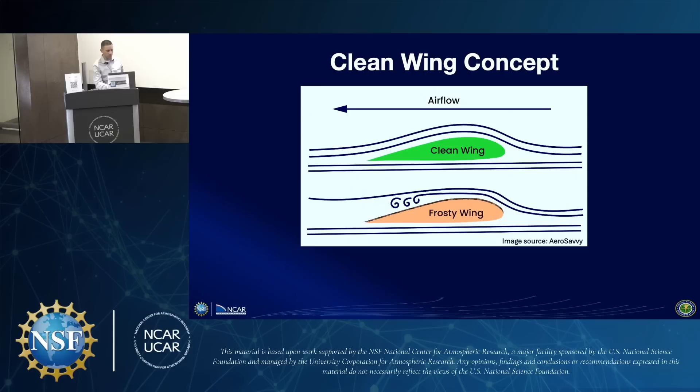So how much contamination on the wing is potentially too much that would cause a problem? Literally as little as 1/4 of an inch of buildup on the wing is enough to affect lift on your aircraft. That'll increase drag, increase weight, decrease your lift, and if you're trying to take off from the ground, it can definitely cause you problems.

So let's talk about some of the incidents that have occurred in the past that highlighted the dangers associated with snow buildup on the aircraft on the ground.

The first one I want to talk about is Air Ontario Flight 1363. This accident happened back in 1989. This was an aircraft flying from Thunder Bay to Winnipeg, and it stopped in Dryden to do a quick fuel up. The problem was when they landed, the auxiliary power unit on the aircraft stopped working.

That meant if they turned the engines off, they would not be able to get the engines restarted. That airport is also a very small airport, so they didn't have power they could hook up to the aircraft to allow it to start the engines again. So while they're stopped there, they're fueling up.

It was lightly snowing at the time. The pilot said, well, I can't turn the engines off, and regulations state that you cannot de-ice an aircraft while the engines are running. So we simply won't de-ice the aircraft.

So before takeoff, it was noted that roughly 1/4 to 1/2 an inch of snow had built up on the wing surface. And as they were getting ready to take off, they became airborne briefly, but because of that added friction on the surface of the tops of the wings, they couldn't gain altitude because they didn't have enough lift. They ended up clipping the tops of the trees at the end of the runway, and the aircraft crashed, killing 21 of the 65 people on board.

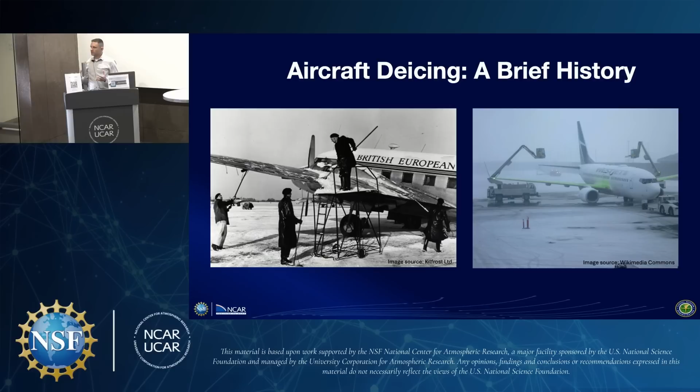So I'm going to give you a little bit more detail on the de-icing fluids themselves. So when an aircraft goes out for de-icing, the fluids that are used we refer to as type 1 fluids. These are non-thickened fluids, and that's important in what I'm going to be telling you on the next fluids that we talk about.

And these fluids are typically water and a propylene glycol mixture. For anybody who's familiar, propylene glycol is the same chemical that's used in antifreeze in your cars. So it's literally the same components that we're using to de-ice the aircraft.

The de-icing fluids are applied hot at high pressure. So the idea is not only do we want to melt any of the precipitation and contamination on the aircraft, we want to blast it off the aircraft as well. We want to make sure that there is nothing left sticking to the surface of the aircraft.

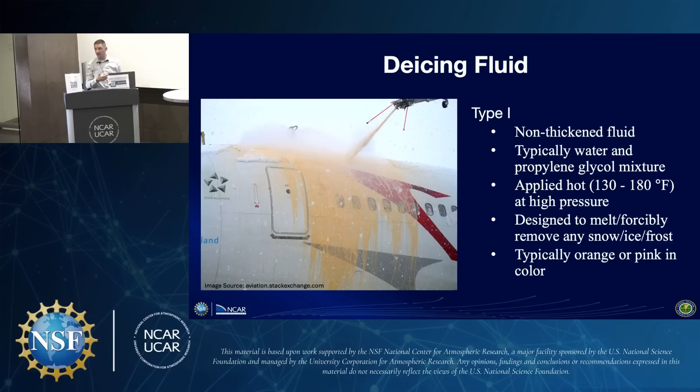These types of fluids are typically orange or pink in color when they're applied. So anybody who's been through the de-icing process, when you're sitting there, especially if you have a window seat and you look out, you'll notice the first thing is probably you're going to see this orange fluid kind of dripping down over your windows as you're going through the de-icing process.

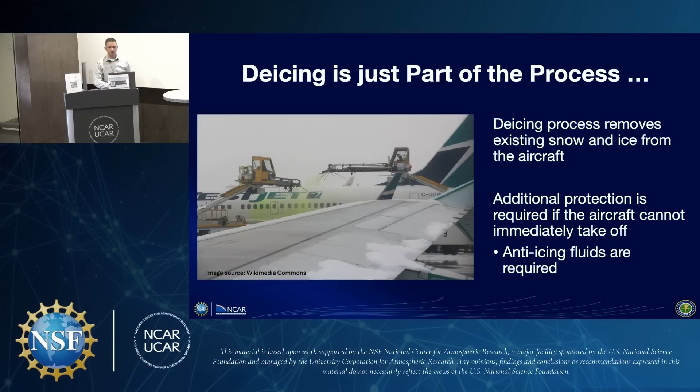However, de-icing is just one part of that process. De-icing will remove the contamination, but if you're in a situation where you still have snow and ice building up on the aircraft, and the aircraft isn't ready to take off, you need to do something to prevent snow and ice from building up. So in that case, we have anti-icing fluids that are applied to the aircraft.

Anti-icing fluids are referred to as type 2, 3, and 4 fluids. These are thickened fluids, and I'm going to talk a little bit more about that coming up. They're applied at ambient air temperature, so we do not heat these ones. We want them to reside at ambient temperature, basically so that the fluid will stick to the aircraft a little bit more.

The purpose of this is really to absorb any of the falling precipitation - rain, freezing rain, snow, freezing drizzle. Anything that's coming out of the sky is going to land in this fluid, and this fluid is going to absorb that precipitation. These fluids are typically yellow or green in color, and they're either propylene glycol or ethylene glycol-based fluids.

The type 2s were the initial anti-icing fluids that they came up with, after they realized, yeah, we can do de-icing, but if an aircraft is going to take off in these continued snowfall conditions, we need to provide protection. Type 2 was what they came out with. That color is mostly straw in color.

The type 3s are designed specifically for commuter-type aircraft. These are aircraft that are going to take off at lower speeds. And I'll talk a little bit coming up about why that's important.

The Type 4s were introduced in the early to mid 90s. They're emerald green in coloring. All of these Type 2, Type 3, and Type 4 fluids can provide protection up to 2 hours, depending on the conditions the aircraft is experiencing. The nice thing about the Type 4 fluids is if you run out of Type 1 fluid, you can simply dilute a Type 4, heat it up, and use it as a de-icing fluid also.

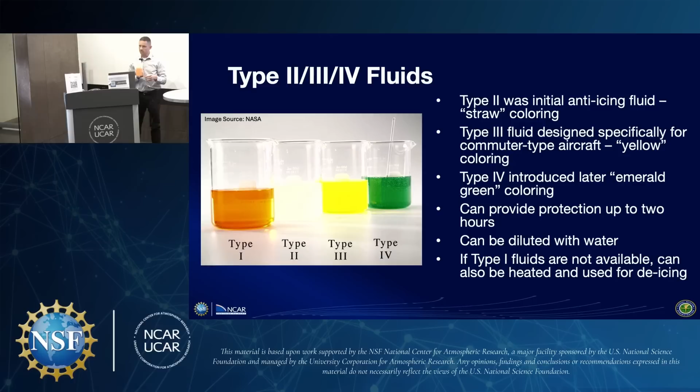Now I have some examples. Here is a Type 1 de-icing fluid. I mentioned that this is a non-thickened fluid, so you notice it's very watery in appearance. So when you apply it to the aircraft, it's heated, it's going to remove the contamination, but it's also going to run off the aircraft very quickly. So it's not going to provide you much protection.

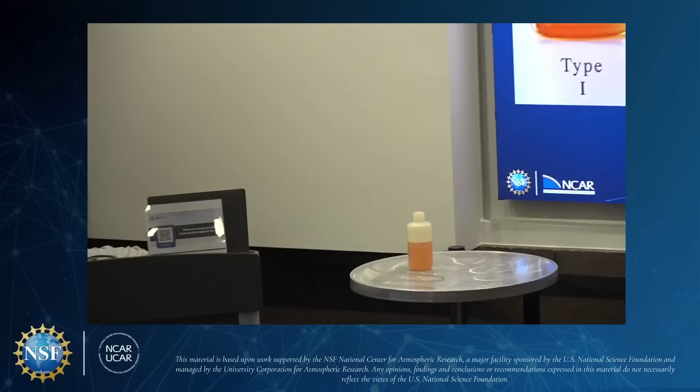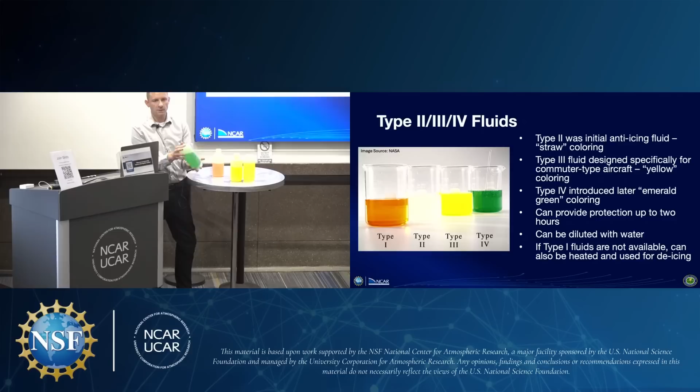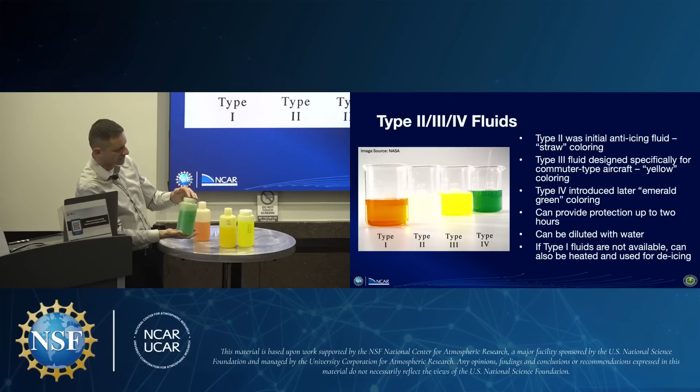Our other types of fluids - we have a Type 2 fluid, which is kind of straw-like in color, a little bit yellow. Here's our Type 3 fluid, which is more for the commuter type aircraft. And then we have our Type 4 fluid as well. Now the difference you notice with the Type 4 fluid is it's much more thick. These fluids are really designed to adhere to the aircraft surface and provide protection so that as it's precipitating, it's not running off really quickly - it's sitting there, absorbing that precipitation. Incidentally, we also call this our Slimer fluid because of the green coloring.

Why might the fluids be different colors? And again, this is for all of you in person as well as those of you online. So I will turn it over to our AV people and let them bring up the Slido questions so you can answer that.

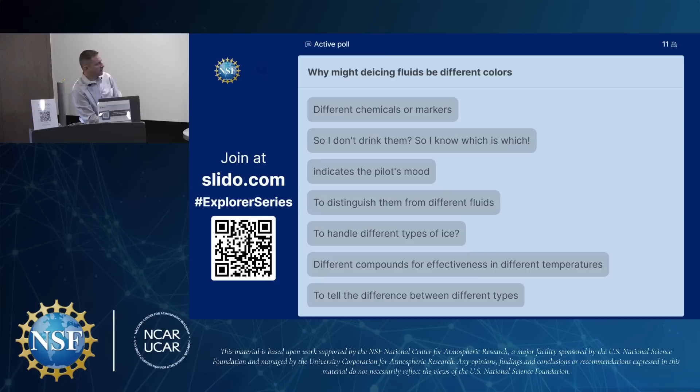Here's our answers. Different chemicals or markers. So I don't drink them, so I know which is which. Fair - I will say you do not want to drink these fluids. Indicates the pilot's mood - also fair. To distinguish them from different fluids, yes, and we're going to come back and touch on that. To handle different types of ice, also a good one. Different compounds for effectiveness in different temperatures, or to tell the difference between different types. So congratulations, you have all hit on the correct answers.

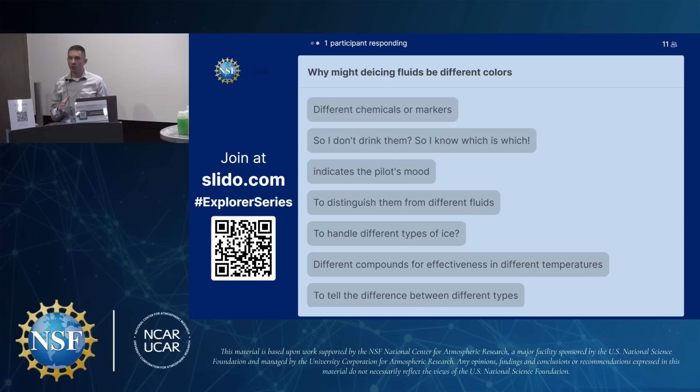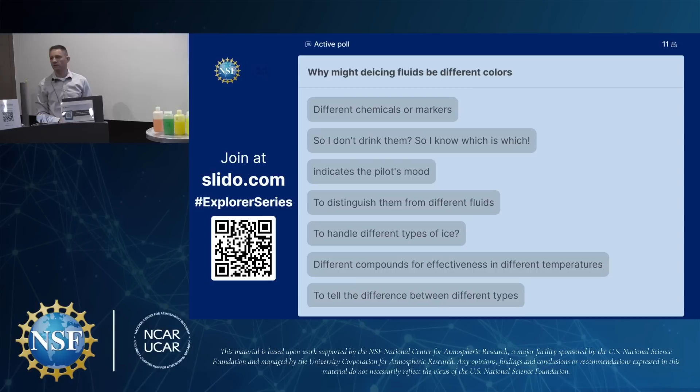The coloring is really twofold. One, it's so the de-icing people, when they're applying these fluids, can tell which sections of the aircraft they have done versus the sections they haven't. The initial fluids were not colored, so when you applied it, especially if it's precipitating, it's really hard to tell where the fluids were on the aircraft. So then we colored them different colors so you can tell Type 1, the very distinct pink-orange color, versus the Type 2, 3, or 4 fluids when applied to the aircraft. Well done - fluid visibility, perfect. All right, let's switch back over.

Now I want to talk a little bit more about these thickened fluids. I said at the beginning of the lecture that there's this clean wing concept - when you go to take off, you don't want anything on the wing. However, this Type 4 fluid, when you apply it, sticks to the wing. That's bad, right? The Type 4 fluids actually had a little bit of engineering that went into them. These fluids have a special polymer that chemists have designed that actually makes the fluid thick. So the idea is you put these polymers in the fluid, you put it on the aircraft wing, and it's thick, and it's viscous, and it's sticky.

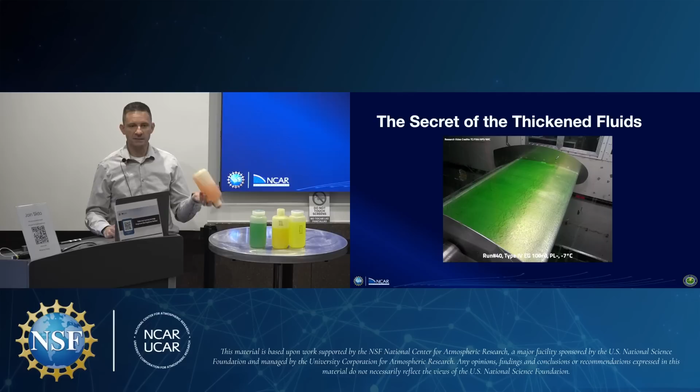But we refer to these fluids as a pseudoplastic fluid, meaning that when there is a shearing force applied, those polymers break down, and this Type 4 fluid will actually turn to the same consistency as a Type 1 fluid. I have up here a demonstration - one of the testing mechanisms we use is taking an artificial wing surface, which is what you see in the picture here, and this is actually a video. I'll start this video running in a second. This is in a wind tunnel. We have Type 4 fluid - you notice the emerald green coloring - and there has been precipitation applied to this. They've applied ice pellets in the wind tunnel to this fluid. And I'm going to start this video running here.

There we go, you notice the flashing. That's a series of cameras set up to take pictures at certain times. What's going to happen is they're going to turn the wind tunnel on, so we have a fluid that has absorbed a bunch of precipitation.

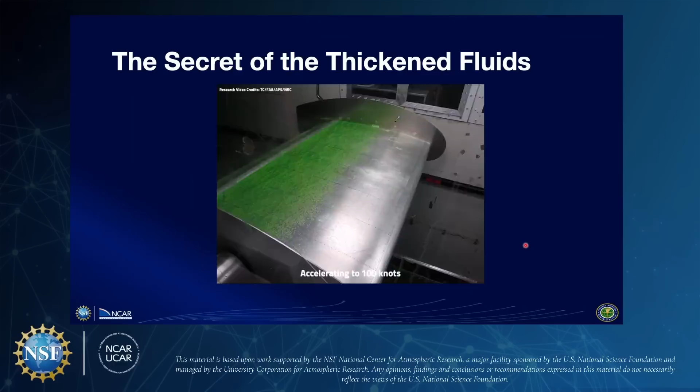It's clearly stuck to the surface, but now we're going to simulate an aircraft accelerating up to 100 knots. As the wind gets stronger and stronger, you notice the fluid becomes thinner and thinner and actually runs off of the wing. So imagine at this point the aircraft is going down the runway, reaching the speed at which it's getting ready to take off. The fluid has now completely run off of the wing along with all of the contamination, and now the wing tilts up to simulate the aircraft actually taking off from the ground.

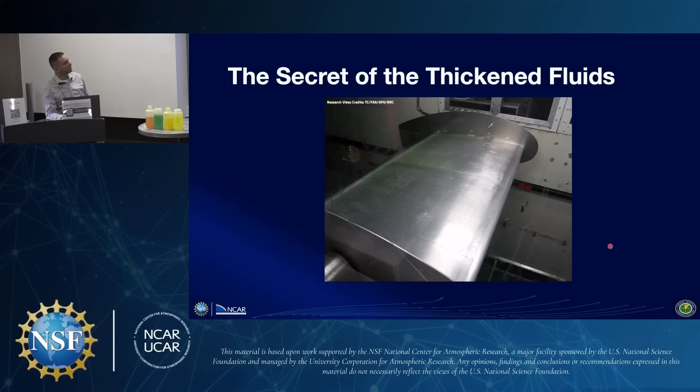So now we have a fluid that provides protection to the aircraft. It's going to stick to the aircraft when you need it to stick, and it's going to run off the aircraft when you don't want it sticking anymore. So a lot of engineering has gone into these particular fluids.

As far as the anti-icing process itself, how long those fluids are going to last is really determined by the type of precipitation that's falling. Is it snow? Is it ice pellets? Is it a combination of mixed precipitation? The rate that the precipitation is falling, and the airport layout, also has an impact on this.

So there are two different ways in which aircraft can be de-iced at an airport. There's gate de-icing. This used to occur at Chicago O'Hare all the time. The aircraft would pull up to the gate, people would get off, new people would get on, they would load all of the luggage, and then before they pushed back from the gate, the de-icing trucks would come up and de-ice the aircraft.

The problem with gate de-icing is as soon as you apply the fluids, you have a certain amount of time you have to get airborne before you have to apply those fluids again. When you do it at the gate, you've got to wait for somebody to push the aircraft back, then you've got to start taxiing, then you've got to get in line. So you're cutting into the time that these fluids are going to last.

Also, you're creating some hazardous conditions on the ground because de-icing fluid is extremely slippery. So there are a lot of slip and fall accidents that occur with the ground crews who are loading and unloading baggage on the planes as well.

The central de-icing facilities, on the other hand, are a big area at the airport, and DIA actually was one of the airports that kind of spearheaded this when they built this back in the 90s. It's a big pad that's located right next to the runway. So the idea is the aircraft will go out to this pad.

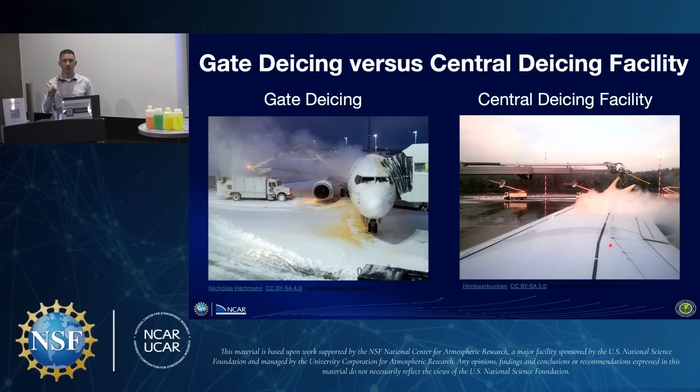All of the de-icing trucks are there. You pull up, the trucks come up, they very quickly de-ice you. If they need to, they will anti-ice you. You're given clearance at that point that you're good to go. Usually you're first or second in line, so you pretty much go, get on the runway, and take off, and you're out of there in 10 to 15 minutes after the de-icing process.

So the central de-icing facilities are really the way that airports are trying to move to cut down on a lot of the time needed for aircraft taxiing while you've got these fluids on the wings.

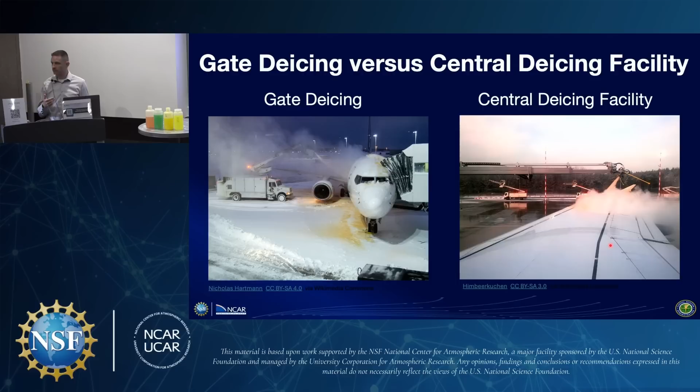So I get a lot of questions once I've talked about these different fluids. The most common one is, how long does the fluid last? Meaning, how long does it provide protection to the aircraft? There's a lot of factors that go into that.

The outdoor temperature, for example, with the type 4 fluids. So I talked about how we have these polymers in this fluid. These fluids are also known as non-Newtonian fluids because not only do they become less viscous with the shearing force, but also as the temperature gets colder, the fluid gets thinner instead of thicker. The reason is that the polymers used in here actually start shrinking down in colder temperatures, and that naturally causes a thinning of the fluid itself.

So the thinner the fluid, the more it's going to run off of the wing, the shorter the amount of time it's going to provide protection to the aircraft.

Precipitation type and precipitation rate are factors, as well as the fluid type, meaning is it type 2, type 3, or type 4, but also the manufacturer of the fluid and the dilution of that fluid. A lot of these fluids can be applied at 100% concentration, or you can apply water to them and thin them down a little bit.

That will allow you to use less fluid, especially if you're in conditions of really light precipitation and you know the aircraft is going to get off the ground relatively quickly. So it's a bit of a cost-saving measure for the airlines.

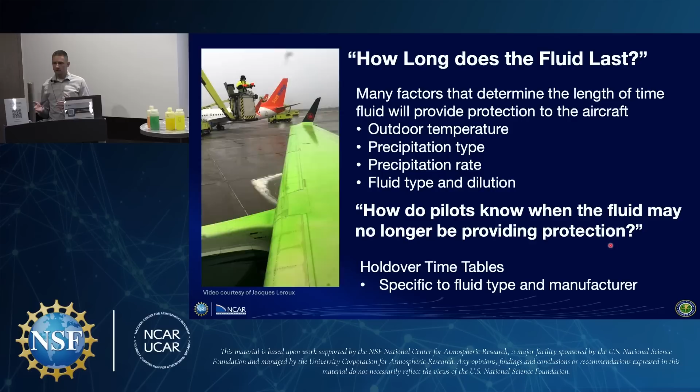These holdover times are specific to the fluid type and the manufacturer, meaning every time a manufacturer comes out with a new fluid, they have to go through an entire certification process with the FAA and Transport Canada before that fluid can be used on an aircraft. One of the things that comes out of that is these holdover tables.

Now, this is exactly one of the tables that a pilot would use. I know it's a little bit busy, but I put it up here just so you can see what a pilot has to deal with when they're going through the de-icing process and they have to figure out how long this fluid is gonna last for them. So I'm gonna walk you through how this table is used, and then I'm gonna give you an example.

So the first thing that they need to know is outside air temperature. They're given information in the cockpit as to what the current weather observations are at their airport. They'll look at this chart and say, okay, the first thing I need to know is ambient outdoor air temperature.

They need to know the fluid concentration, the fluid water by percent volume. That will be given to them by the ground crew that's telling them what type of fluid is being applied to the aircraft. And then they have to know what the precipitation type is.

So this table will give them times for freezing fog or ice crystals, snow, freezing drizzle, light freezing rain, and rain on a cold-soaked wing. Cold-soaked wing being an aircraft that has just landed. It was up flying at altitude where it's minus 60.

It comes into an airport, and maybe the airport temperature is slightly above freezing and it's raining, but your wing temperature is below freezing, which means rain hitting the wing is gonna freeze on the wing. So they have a category for that as well. Anything else listed up here, they don't have any guidance for, which falls over in the red area.

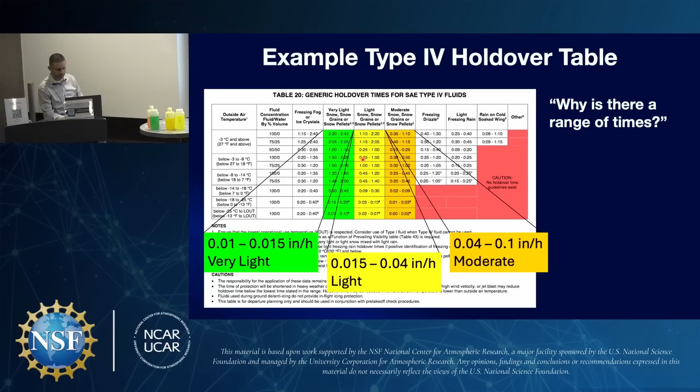It's a series of plates, and those plates are angled at 10 degrees. That 10 degree angle is done intentionally to simulate the angle of an aircraft wing, the top of the aircraft wing. So you apply the fluid to the top of the aircraft wing. We want to make sure that as the fluid is slowly moving down the wing due to gravity, we're simulating that same thing with these tests.

So we have a bunch of different plates set up, and we go out and pour the fluids on the plates. We also have what are called rate pans, not shown here, but pans similar in size to these plates that they put out there. They also coat them with fluid and leave them sit for 10 minutes. It will snow on those pans. They'll weigh them before they take them out, and then bring them inside and weigh them again. Subtract the difference, and they know how much snow, liquid equivalent, fell into that pan.

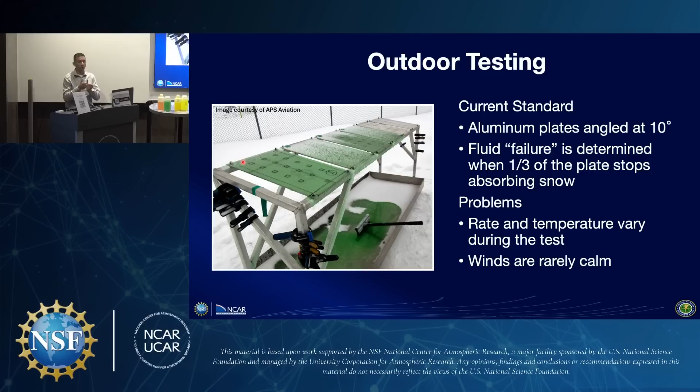Now, there are problems with doing this. Conditions outdoors are rarely ever constant. So you set these plates up, you let it precipitate, a snow band may move through. Maybe initially you've got really heavy snow, and then throughout the course of the testing it may taper off to lighter snow. Also, the temperature throughout the testing may change as well, maybe warming up, maybe cooling down. So that becomes a problem of how do you start addressing those variables when we know they impact how long these fluids are going to last.

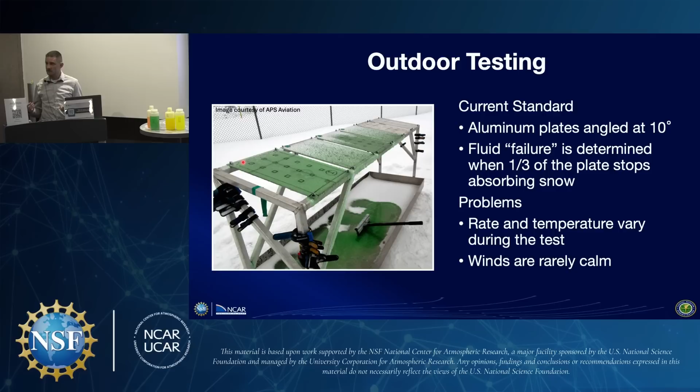There's also the problem of winds. Winds are rarely calm, and winds can further impact some of the fluids. I'm going to talk about how that is in some of the data we've analyzed on the NCAR side to show that wind actually does play, sometimes, a very significant role in how these fluids react.

So I'm going to start off with this chart. Using the assembly I just showed you outdoors, they would go out, pour these fluids on, and for a given temperature range they're aiming to have snowfall rates at all different intensities. This plot shows failure time, meaning the time the fluid actually failed, versus the liquid water equivalent snowfall rate. We can see it's not a linear relationship, it's a power relationship, but the line you see going through the points is the best fit line.

So for moderate intensity snowfall, that's the area in gray that you see here. To come up with the times in that holdover table, you would simply look at this line and say, here's the short end of the time for moderate snowfall rates, and here's the longer time. The longer time is up here, the shorter time is down here.

So going out and doing this testing and getting a bunch of these different data points and then fitting one of these lines and looking at the ranges of moderate is how we come up with those ranges of time. This chart looks good. The dots are all very close to the line, which is what you want to see.

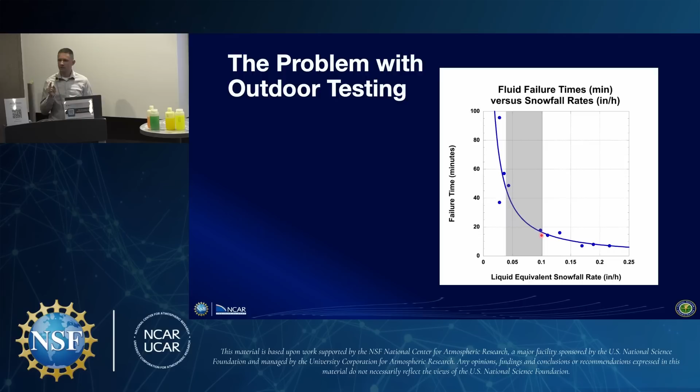Until you look really closely at this plot, notice the 2 points that I have arrows pointing to. These points have roughly the same liquid water equivalent snowfall rate, however their failure times are very different. The one on the bottom had a failure time of about 35 minutes, but the one on top had a failure time of 90 minutes. There's almost an hour difference in these 2 particular tests, and yet the average liquid water equivalent snowfall rate was the same for the 2 of them.

This is where the FAA and Transport Canada and everybody is saying, why is this? Why do we see these conditions? A lot of it goes back to outdoor testing, where you have variations in the snowfall rate throughout the test. Maybe the average rate was 0.03 inches per hour, but maybe it was really heavy at the beginning for one of the tests, and really heavy toward the end for another. Because of that, you end up with very different failure times of your fluids.

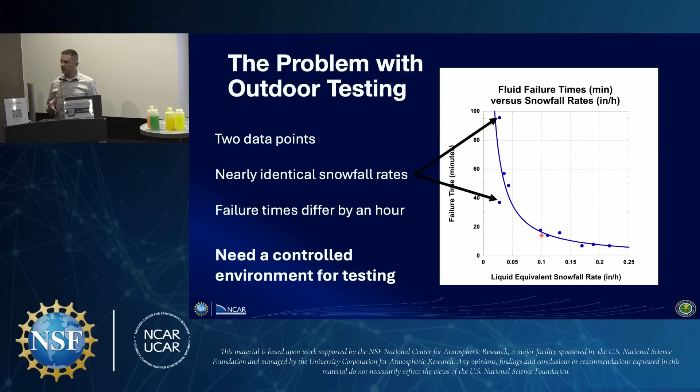So that means we need a controlled environment to do this testing in. This was recognized back in the 1990s, where the FAA, Transport Canada, and APS Aviation said outdoor testing is okay, but we really need a laboratory-controlled environment where we can do this testing. That means we need to find a way to bring the snow indoors. We have to develop a method where we can have it snow indoors and control these variables that we think are impacting fluid failure time, like temperature and snowfall rate.

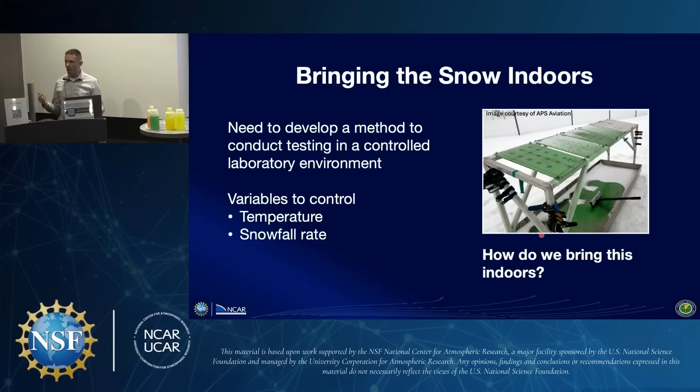So that brings the question, okay, how do we bring this indoors? Which brings me to my next Slido question for audience participation. How would you make it snow in a laboratory? I'm very impressed with all your answers so far, so let's see if you can nail this one also.

Snow machine, build a snow machine. Clearly some of my colleagues calling in online are cheating on this question. Pray and ask God to make it happen - probably not gonna work so well, but we have not tried that. Shave off pieces from a block of ice and let them fall - again, one of my cheating colleagues online. Use the same stuff as they use at the ski resorts. What a novel idea.

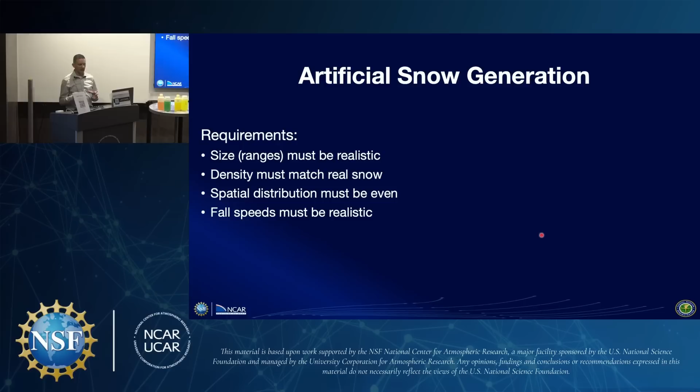If we're gonna build an artificial snow generation system, the requirements are that the size of the snowflakes must be realistic, the same size as what we see outdoors. The density must match real snowfall. The spatial distribution, meaning the pattern of snow falling over that test surface I showed you, has to be even. And the fall speeds of the particles must be realistic - you don't want snow falling at 10 meters per second and plopping into the fluid, because that's gonna cause problems.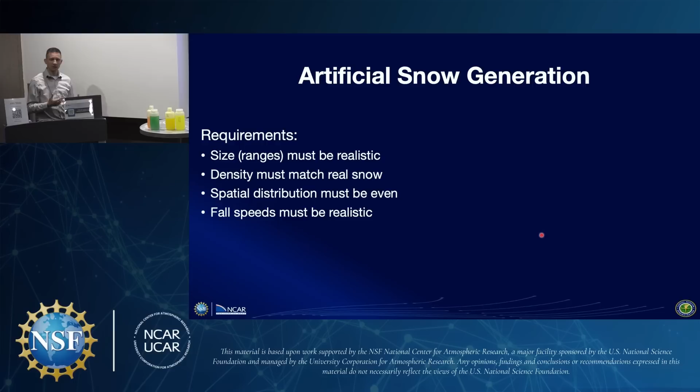So the first thought we came up with was, let's look and see what the ski resorts do. Ski resorts take water and spray it into a very cold environment to create their snow. We went out, gathered some of that snow industry snow, and looked at it under a microscope - and this is what it looks like. It does not look like snowflakes. In fact, they are very small frozen water droplets, many of which have actually frozen to each other - really more like tiny ice particles that the ski areas are generating.

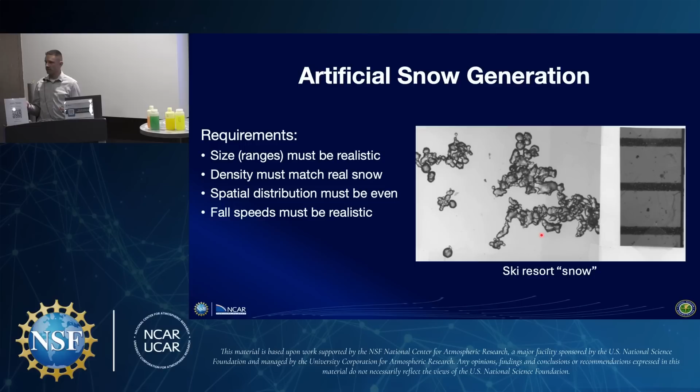That obviously means the density is not going to be right, and the snowfall rate isn't going to be right either. So this was not really a viable option for us. But we said, if we can't use ice in this manner, we could think of shaving ice, like a giant shaved ice machine. We ran with that idea and developed the NSF NCAR FAA Shaved Ice Snow Machine. The idea is that we create cylinders of ice loaded into a linear translating system that feeds them into a specially designed rotating carbide bit that shaves the ice off, creating snow-like particles.

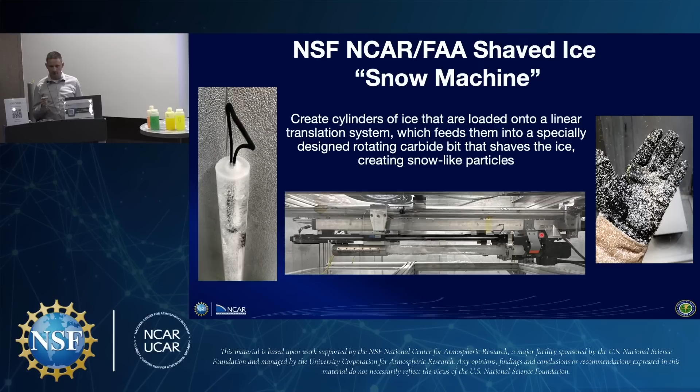Great in concept, actually works fairly well. I will say that this particular process has been something we have been working on for decades now, because while it may seem simple in concept, there are a lot of little nuances in being able to create this. And I'm going to talk about some of those.

So let's start with the ice creation process. How do we actually create the ice cylinders themselves? Initially we thought, perfect, we're going to get a metal cylinder, put some water in it, stick it in a cold room, let it freeze, and then bring it out into the open, into the warm room, and that cylinder is going to warm up, and we're going to be able to pull the ice cores out, and they're going to be perfect.

The problem was, ice likes to freeze from the top down. So when we put it in there, ice would freeze at the top, which would then increase pressure at the bottom as it was freezing down, and we would break the bottoms off of our molds. So we needed to devise a method to get it to freeze from the bottom up.

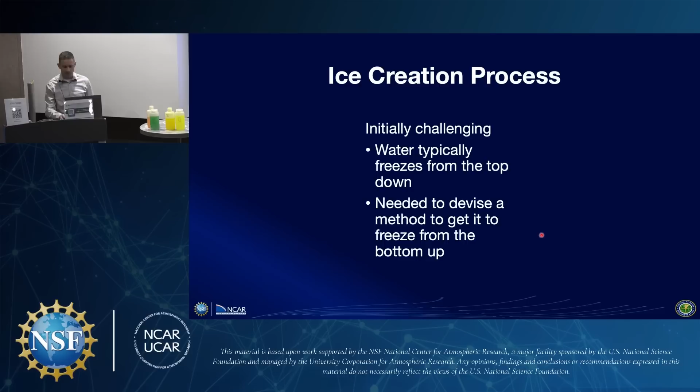So here's an example of our ice molds that we use. We take insulation, and we put really heavy insulation at the top, and then we taper it down to no insulation at the bottom. This essentially solved our problem. Now it will actually start freezing closer to the bottom first, and then that water pressure gets pushed upwards, so that now you get freezing from the bottom up.

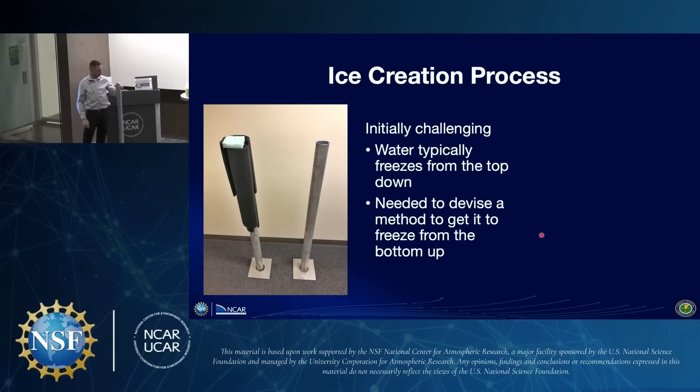To give you an idea of how big they are, this is an example of one of the ice cores that we feed into the machine itself. And this is one of our cores. So you can see nice formation of ice. Once you do that tapering, you do get lots of air and stuff that tends to get trapped in it, but for the most part, you actually have a really nice ice core that then you can take out and load into the machine itself.

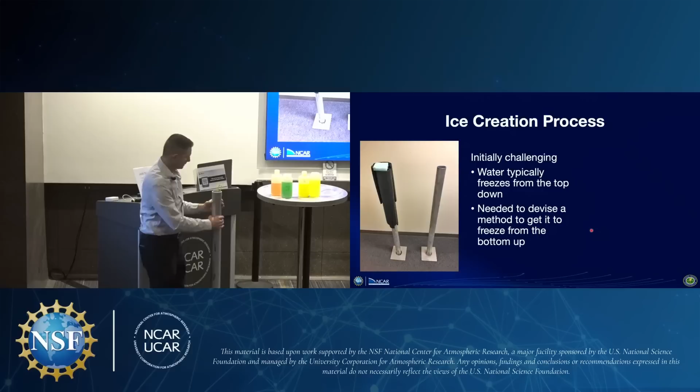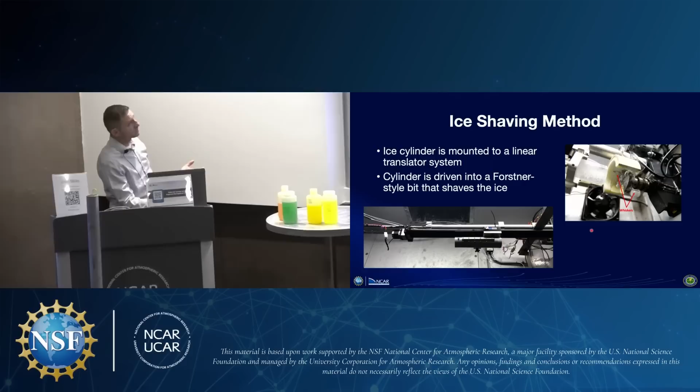Okay, so we solved the ice core problem. We were able to get these nice cylinders of ice that we could then load into the machine. So the ice cylinder is mounted to a linear translating system. Those of you familiar with a 3D printer, same type of idea.

We have this device here, which is our connector. So we load the ice into that. It's attached to a lead screw and a stepper motor back here. So the stepper motor turns, which then moves the ice along and feeds into a Forstner-style bit at the other end of the machine. This is one of our original designs that we had come up with for the machine.

At first, we simply just had the translator and the Forstner bit, and we would turn the machine on, and of course, the ice shavings would go everywhere. All over the top, all over the sides. So you can imagine when you're trying to do testing on some of these plates, when you get it down to the bottom of the machine, eventually you get big clumps that fall off the top of the machine and fall down onto the plate at the bottom. This was a problem for many, many years.

We finally came up with this idea where we have this half-moon crescent shape that is very close to the drill bit itself, and then we attach these whiskers to the drill bit. So as the drill bit is spinning, snow gets flung out and sticks to the bottom of this, but those whiskers then come around and scrape the snow off. So all of the snow now gets directed down to the bottom of the machine.

The problem with this initially was we were using foam and stuff, and if you didn't get it aligned perfectly, you would get chunks of foam that would also come flying off and land down on your test surface below. So we had to go back and do some redesigns of that.

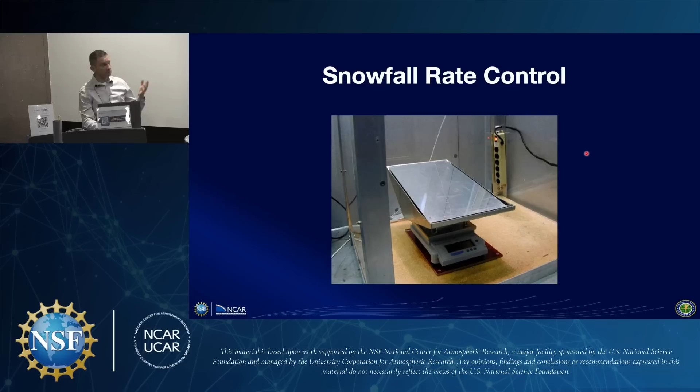Then we also had the problem of how do you control the rate of ice being fed into the drill bit to come up with a consistent rate. So we have our tray assembly at the bottom. We have our 10-degree test surface, just like you saw outdoors. We have a mass balance at the bottom of the machine that's simply weighing the weight of everything on top of it.

This is connected up to a computer. So as we run the machine, snow falls down onto the plate.

Because we have this nice fluid containment assembly, when we pour the fluid on the plate, any fluid running off the plate gets captured in that fluid assembly, but it's all confined on top of the balance. So we're not losing any weight from fluid coming off of the plate. The only thing that's being added is the snow.

So based on the amount of snow that's being added, because of the addition of the weight, we can derive what that snowfall rate is. And based on that, the computer can control how quickly it's pushing that ice core into the drill bit.

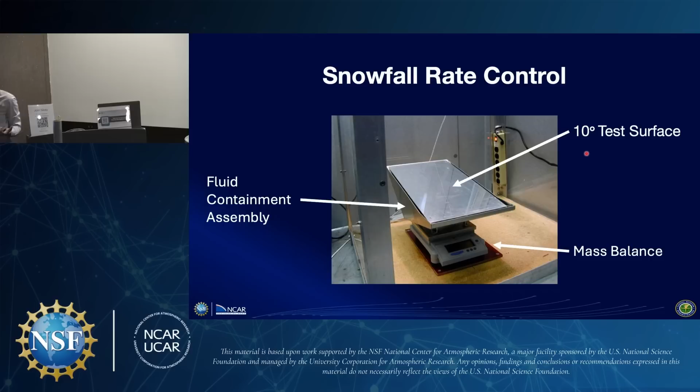Here is one of our test surfaces. This gives you an idea of the size of the test surfaces as well as the fluid containment unit.

So in any given test, we simply pour the fluid over the top of the plate. We let it run down the plate. And then this would sit on the mass balance and simply collect the snow as the snow falls down from the top of the machine.

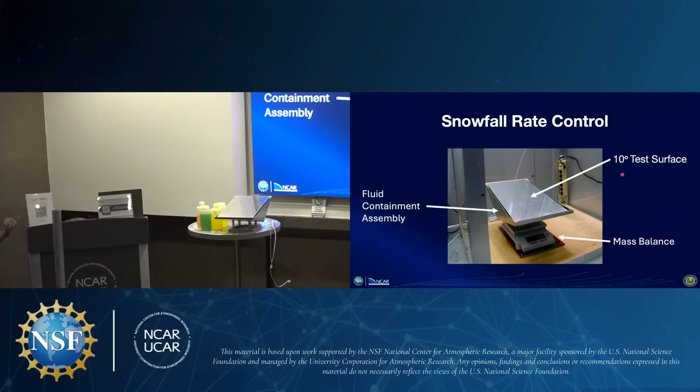So we said, okay, great, we've solved the snowfall rate problem. We know how to do that. Now we've got to design the computer interface. So this became a little bit more challenging. We were able to do it.

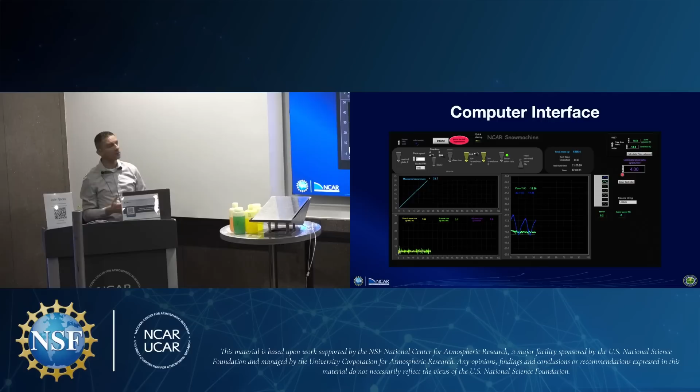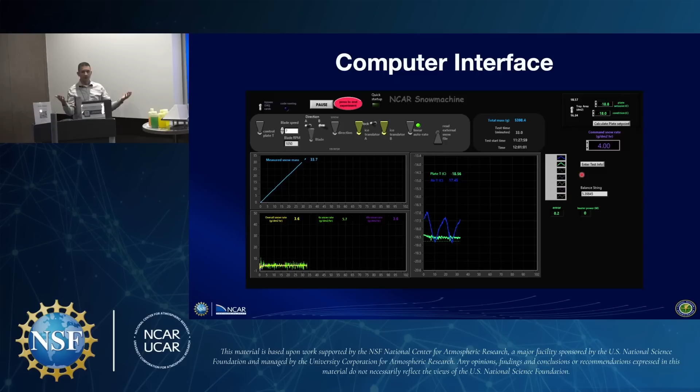So we have full control of everything that happens in the machine. We can turn the blades on. We can simply put in the rate that we want the snow. The computer will control that rate. And then we can record all of the information coming out of the machine.

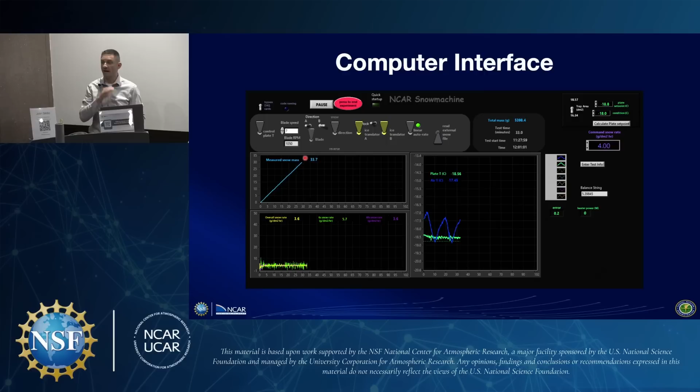So we can monitor the air temperature. We can see the snow mass. This nice straight line shows that we have a constant amount of snow mass being applied to the plate. So we've been able to successfully achieve a constant snowfall rate.

So that's the mass, and then we can actually monitor the rates in real time at the bottom of the machine.

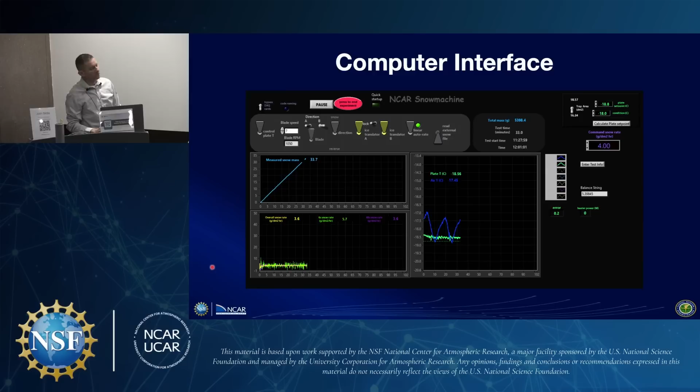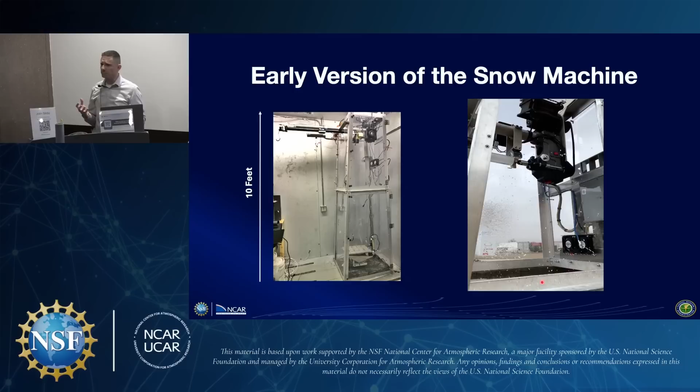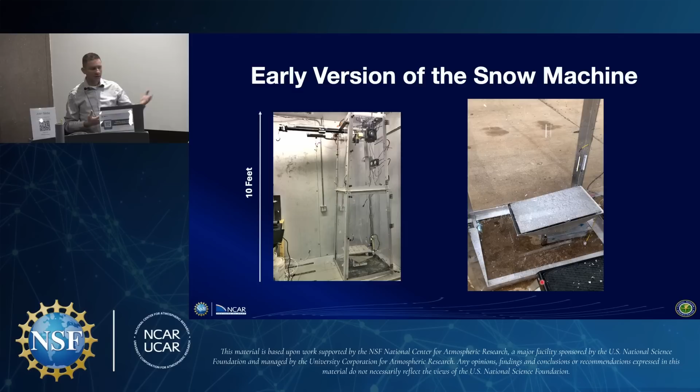Great, so put it all together, and here is what the early version of the snow machine looked like. I'm gonna play a little video for you. Initially, we were using a drill press mounted on its side with a bit attached to it to do the actual ice shaving. You can see from this video that you are getting what looks like snow-like particles that are being shaved off of these ice cores and falling down onto our test surface at the bottom.

The problem that we were having was that spatial distribution problem. Because we had one point that we were generating snow, we'd get a lot of snow right over the middle of the plate, and then it would kind of taper off as you got out toward the edges of the plate. So we would see this streak of snow that would fall down the middle of the plate, and you would get less out here, which is not realistic for the outdoor conditions.

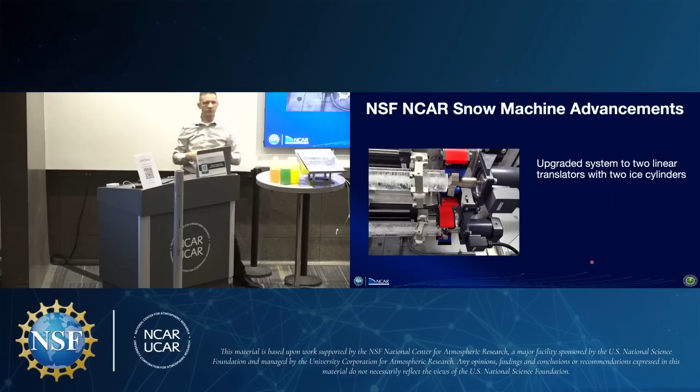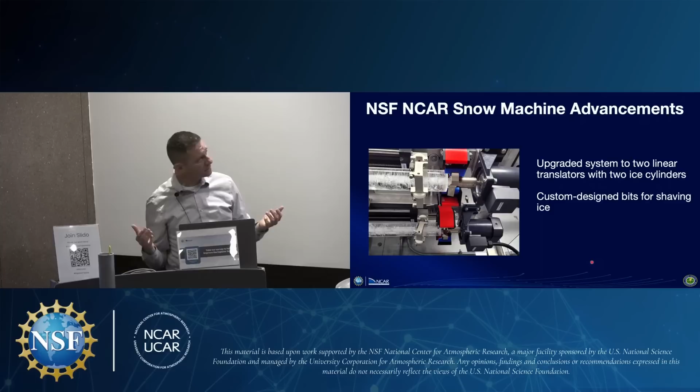So we said, let's do an upgrade. Let's put 2 ice cores in. And instead of using a drill press, let's swap those out with variable speed motors. We did this, and had some custom design bits for shaving the ice that were designed as well.

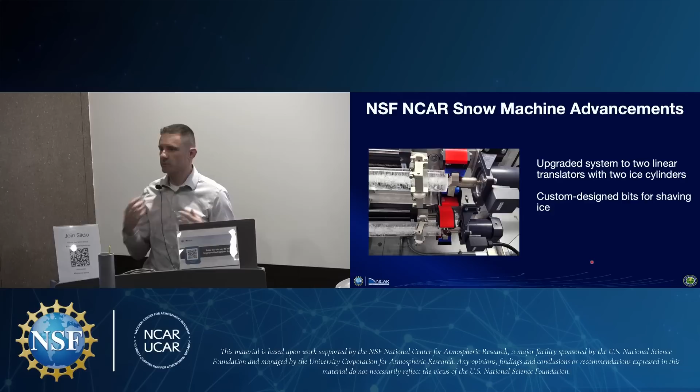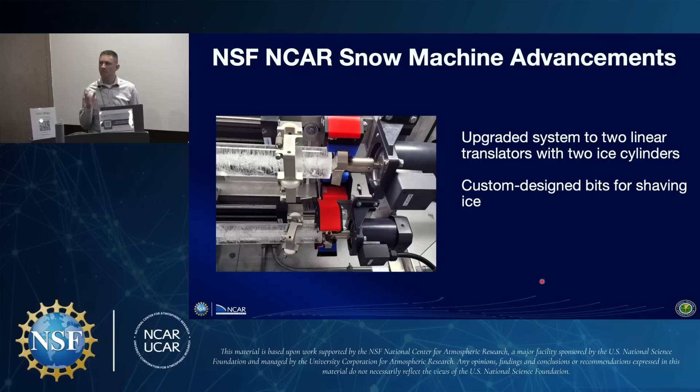We were having a lot of problems with the bits getting dull very quickly, also chipping away at the ice, which wasn't giving us consistent shavings that mimic snow. So we had to custom design our drill bits. We found that the angle of the bit, even by 1/10 of a degree, made a huge difference in the type of snow that you would get out of these ice cores.

We replaced the drill press with the variable speed motors. The advantage to doing that was by controlling the spin rate of the bit, we could actually control the size of the snow particles that we were generating. Slower spin rates means the ice core isn't being shaved as quickly, you get bigger flakes. Spin it faster, and you're gonna get smaller snowflakes. So now we can actually control the size of the snowflakes and test these fluids based on particle sizes.

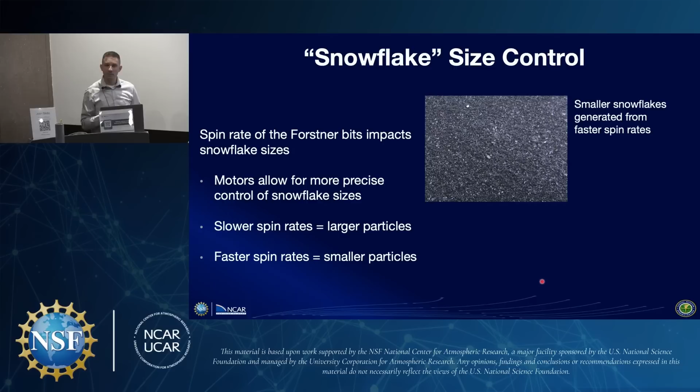So what does that look like? Here's an example where we had the spin rate of the bit really fast, so we were getting these really small particles, these really small shavings of snow. Then when we slowed it down for the same conditions, same rate, same temperature, now we could see that we were getting bigger snowflakes.

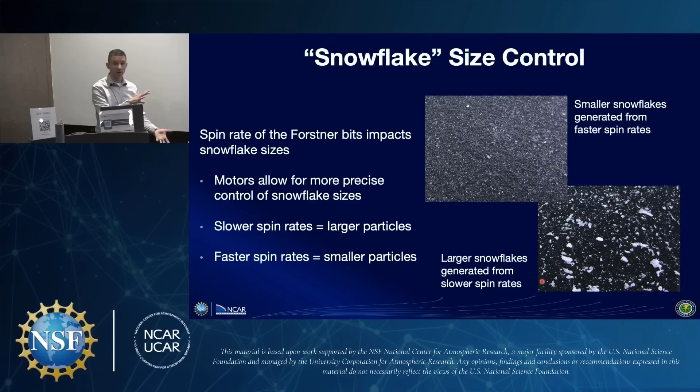So this has given us an advantage that we can really look into some of our outdoor environments at warmer temperatures where you may see these big aggregate snowflakes that are falling sometimes, or smaller snowflakes. We can go in and simulate both conditions. We could not do that very easily before.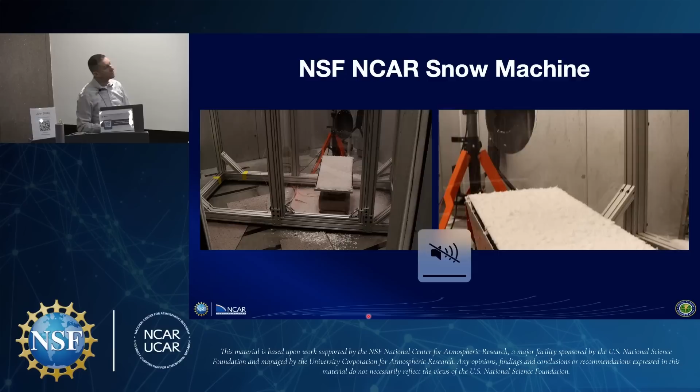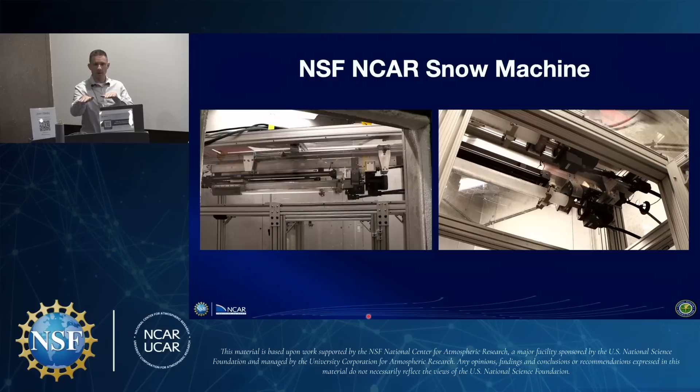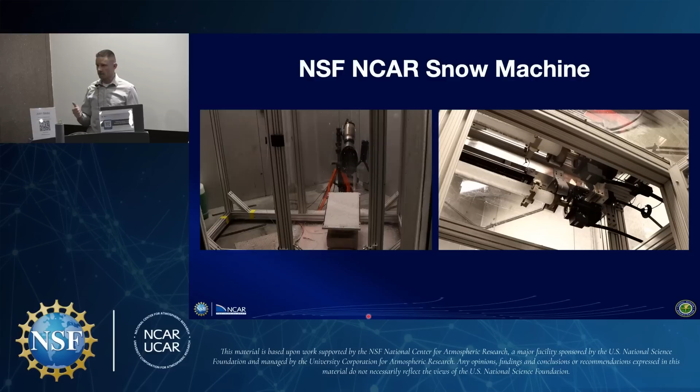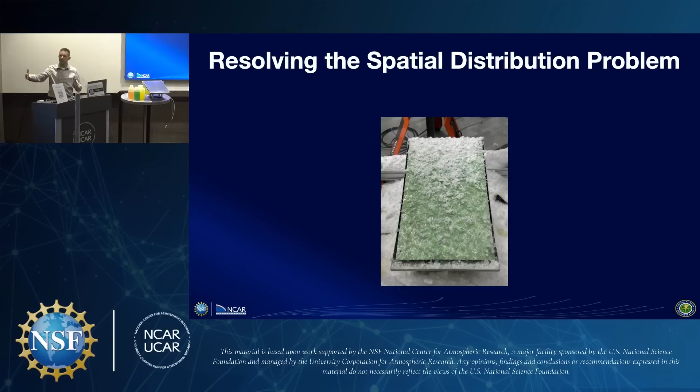So now when we do our testing, instead of getting that line of snow down the middle, we get this nice failure that goes from the top of the plate down toward the bottom of the plate, just like we see in natural outdoor conditions. So we finally checked that last box.

And this latest version of the machine actually just came into being last year. So we're literally on the forefront of finally solving this longstanding problem. I'm gonna talk a little bit about what that means for where we move in the future.

Now, I also wanna show you, because I've talked a lot about the fluids, when we apply fluid to the plate, what does it look like in terms of the fluid being absorbed in, or the snow being absorbed into the fluid? Here's an example from the machine itself, where you can see snowflakes coming off, falling into the fluid, and you can see them dissolving into the fluid itself, and the fluid absorbing them and holding on to them, so it isn't adhering to the surface of the test plate itself, and that's what we want to see.

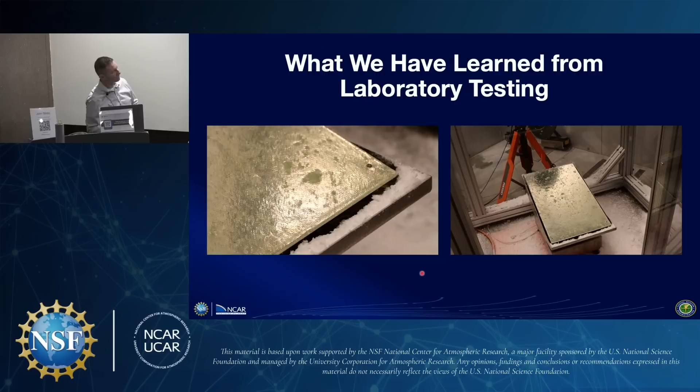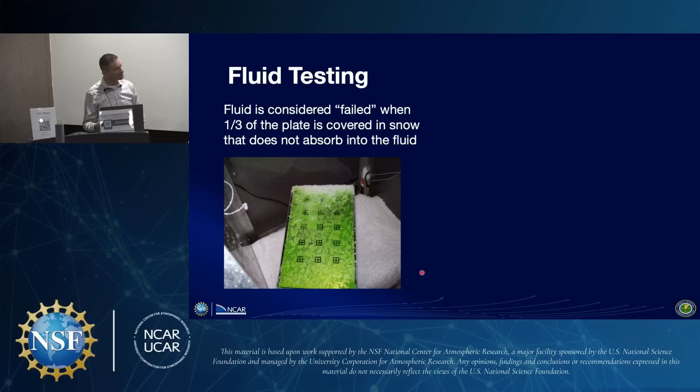So what have we learned on the NCAR side of things? As I mentioned, the fluid is considered failed when 1/3 of the plate is covered in snow. One thing that we looked at when we first started doing testing was what is happening with the temperature of the plate itself as you're doing these tests, because the temperature of the plate or the wing is also going to be important. So we embedded a temperature probe in the back, and then we ran a simulation.

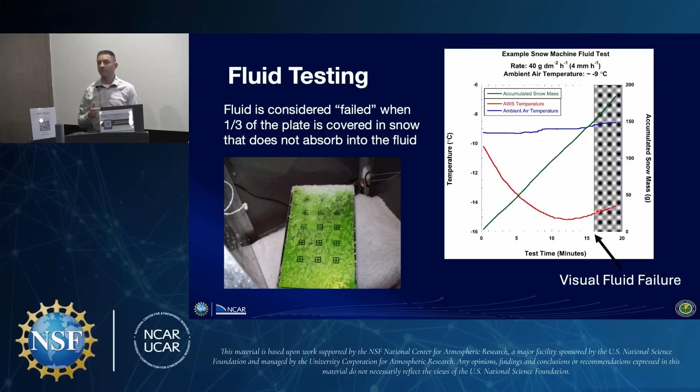In order for that snow to dissolve into the fluid, it's got to pull heat from somewhere, and it's pulling the heat from the wing or the test surface. So as it pulls the heat out, it cools the surface of the wing or the test surface. Knowing this, we should be able to model this behavior, because if we can model this behavior, then we can have an idea going forward of how long these fluids are going to last under the given conditions.

I promise it's not that hard to understand. I will walk you through it, I promise.

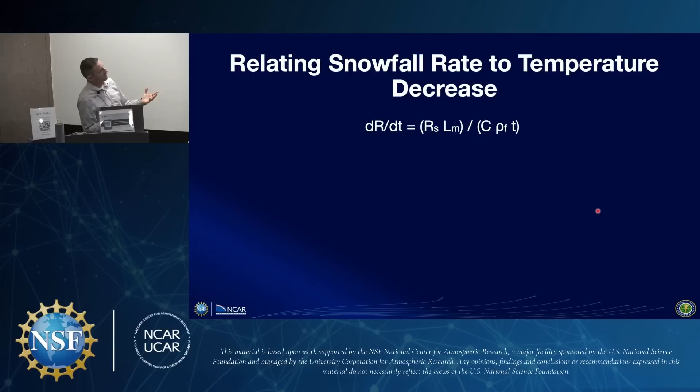dR/dt is equal to R sub s L sub m divided by C rho sub ft. R sub s is the snowfall rate. So we're simply relating the snowfall rate to that temperature decrease. Our snowfall rate, we know, is constant. It's not going to change.

We have the latent heat of melting. You can think of that as the heat that's needed to change the snow from a solid to a liquid, or to dissolve the snow into the fluid itself. So the snowfall rate and the latent heat of melting are constants. Those aren't going to change.

The things that are going to change are the heat capacity, which is the ratio of the heat absorbed to the resulting temperature change that we see in the fluid or the plate, the fluid density, and the fluid thickness. So if we can model those things, then we should be able to model how these fluids are going to fail.

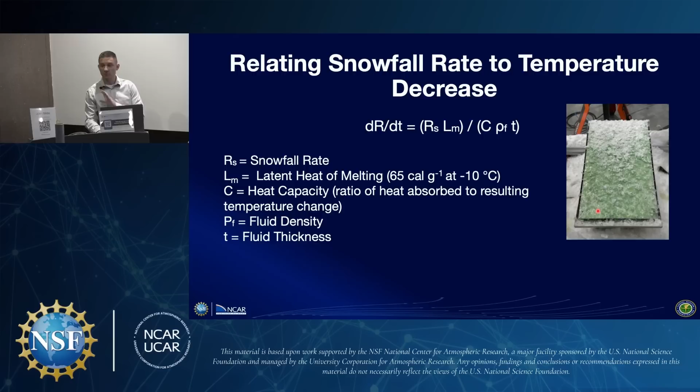So if we take that and go back to the example I just showed you with that plate temperature drop-off, you can see at the beginning of the test, our theoretical cooling matches exactly what the temperature of the plate is doing. And then as the test gets further along, because we aren't accounting for change in fluid density or thickness of the fluid, or the change in heat capacity, our line just remains a straight line going down, while instead the line we're seeing from that plate temperature dips down and comes back up.

So is this something that we can use in the future to help better understand when these fluids are going to fail? Yes, we can certainly use that to give us an idea. Is it something we can actually use in practice? Probably not. People aren't going to be too comfortable relying just on this model to determine when the fluids are going to fail.

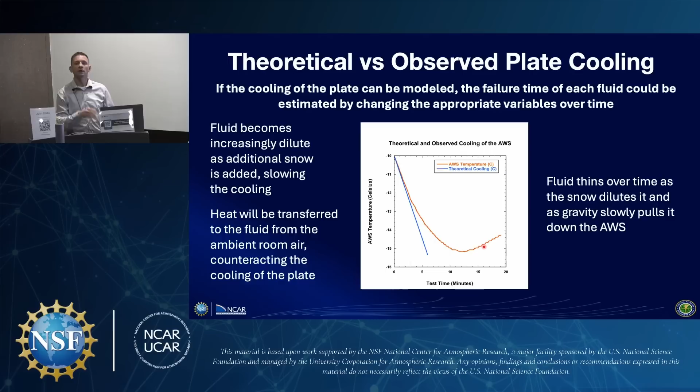We're still going to have to do that testing in a snow machine or an outdoor testing environment. So as I said, the fluid becomes increasingly dilute, which is going to slow the cooling. The fluid thins over time because gravity is pulling the fluid down the plate, but we're also thinning it out because of the water that's being added to the fluid itself. And then heat will be transferred into the fluid from the ambient room air as well. So it's not pulling heat just from the plate. Primarily, yes, that's where it's coming from. But the air temperature in the room is also impacting that.

So how does our laboratory testing compare to an outdoor test? We were able to take some outdoor data where we put one of these tray assemblies outside and let it snow outdoors. You can see the purple line here was the snow mass accumulated outdoors, and the light blue line was the simulated snow mass we did in the snow machine itself. The red and blue lines here: the red one is the outdoor temperature of the plate, and the blue line is the temperature of the plate inside the snow machine itself.

So the snow masses match very closely, but you notice that the failure times are different between the two. The reason for this - and if we look over a longer period, we did a whole bunch of tests, it wasn't just this one, this is a good example - but if we do all of them, we see that the testing we do indoors is consistently shorter than the failure times we're seeing outdoors. There is some scatter in the data, but it's consistently shorter.

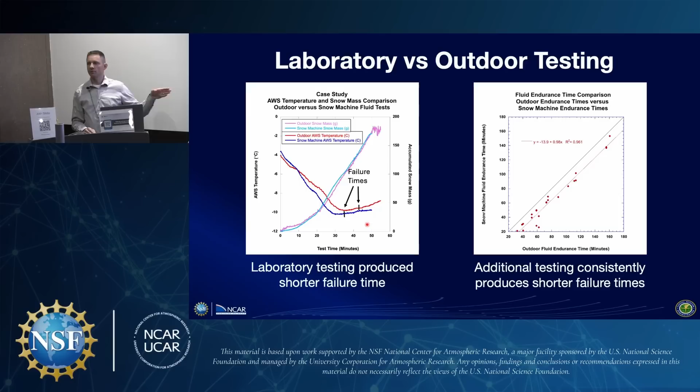The reason for that is wind. Outdoors, you get wind blowing over the surface, and your ambient air temperature is warmer than the temperature of the fluid and the temperature of the plate, so you're adding additional heating to the fluid, which is going to make it last longer. So if you want to do the most conservative testing that you can for these fluids, doing it in a laboratory environment like we're doing, where you don't have wind, is actually the best way to go.

So where are we at now in terms of next steps? There is an international community that meets consisting of all the fluid manufacturers, all the airlines, and all the regulators, meaning FAA, Transport Canada, EASA in Europe, and they get together twice a year. There's a big meeting held in May every year, and a smaller meeting in November, where updates are given on the status of new fluids coming out, tests being done on the fluids, and the snow machine is at the forefront of these discussions.

Everybody wants to see the snow machine become the international standard for testing these fluids, because you can do it anytime year-round. You can do it in a laboratory environment. You don't have to wait for the right conditions to occur outdoors. You can simulate them yourself, and you minimize a lot of the problems we see outdoors. You're going to minimize the scatter that we see in a lot of these different data points.

It'll also allow us to assess the impacts of different snowflake sizes on failure times, because there are questions we're getting where they say, yeah, this one test had snowflake sizes a lot bigger than this other test. We think that's potentially a problem. They're also looking to explore the integration of other precipitation types—now that we can do snow, can we put nozzles in there and do snow and rain at the same time? And can we come up with holdover times for those situations?

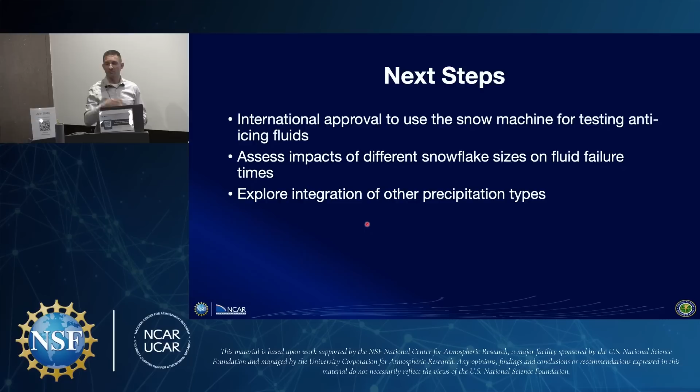So I know I've hit you with a lot of information. I could easily turn all the information related to ground de-icing into a half-a-day lecture series on everything that happens. I can see that I've bored some of you to tears already—some of you are falling asleep back there. I won't call any specific people out.